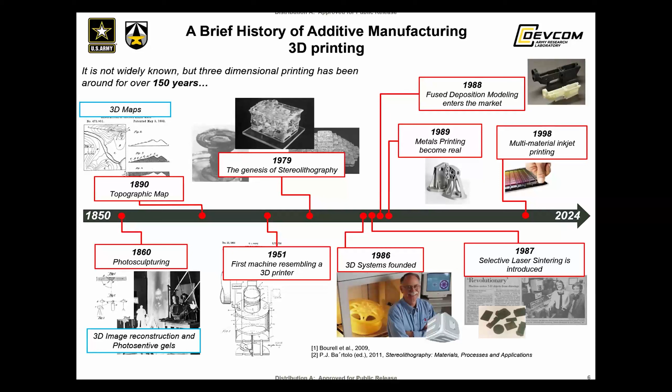So you can see additive manufacturing went through quite a revolution since the 1850s. Here I show you some fun facts about additive manufacturing, why we do it, and I can highlight key phrases or keywords from a patent that was filed in 1864.

You can see that it's the same words that we have been using to justify why we want to do additive manufacturing: greater rapidity, less cost, less time necessary for production. You can scale to a larger or smaller dimension, any proportion desired. All this is the advantage of using additive manufacturing.

So the example I show here is a full body 3D body scanning device. Back in the 1860s it takes a whole building for you to reconstruct a 3D dimensional body. Now we just need a small room to scan the whole body, and then we can actually print the scan as well. So this is an old concept, but now we can do it readily and quickly. So that's a fun fact.

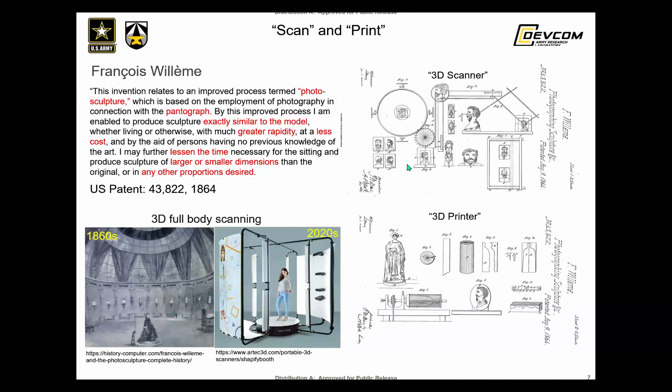Now let's refer back to what they call layer by layer additive manufacturing. In the past, there was a lot of demand for topographical maps for the military. So one way to reconstruct the topographical map is slice by slice reconstruction. This is exactly what they did in the past, and this is a concept for additive manufacturing, layer by layer.

And then recently, of course, we have some machines that are obsolete by now, but were state of the art back in the 80s and 90s.

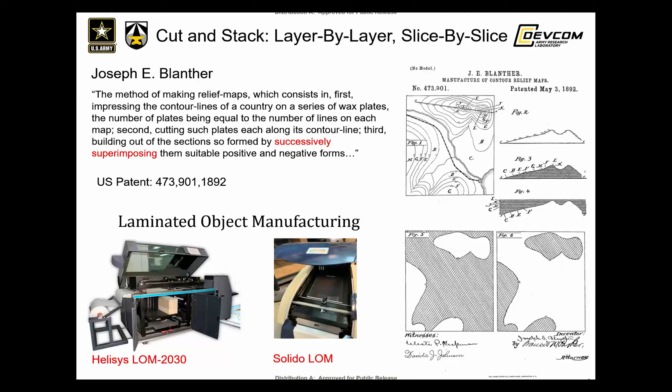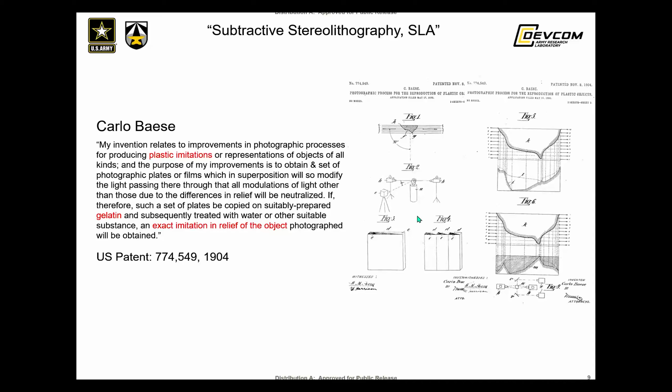One more important patent here is stereolithography. Now everyone knows what the STL file is, that's where it came from. It's the stereolithography technique for building layer by layer using a photosensitive resin. And of course, it's the 3D Systems company that made this technology widely available.

And then, of course, selective sintering, led by a group of inventors at the University of Texas, Austin, in the late 80s. That's what kicked off the renewed interest in 3D printing or additive manufacturing.

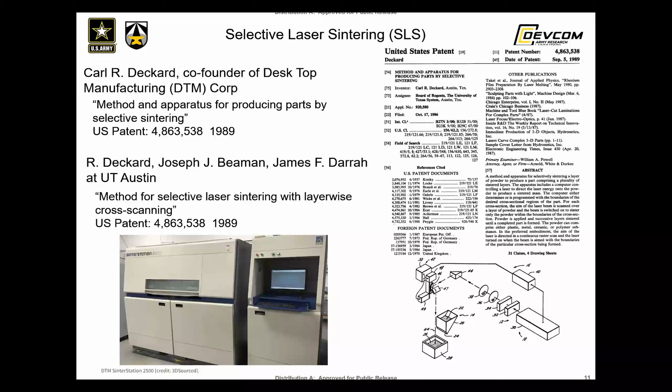And of course, FDM modeling, a 1992 patent, which later became the Stratasys system. This actually popularized 3D printing technologies.

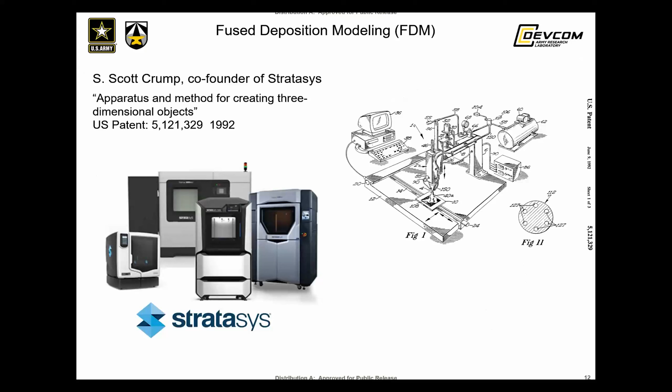All right, now let's switch gears a little bit to share with everyone what the Army Research Laboratory is doing in terms of additive manufacturing research.

So we are an organization that focuses on feedstock development for additive manufacturing, including high strength steel, aluminum, magnesium, and refractory metal. Nick Coogan is going to go over his field of research, which is ceramic additive manufacturing.

But we deal with the same thing: feedstock development, modeling, simulation, and digital tool pathing, as well as in situ monitoring, all feeding into expeditionary manufacturing.

That is to say, we want to manufacture parts in the field at the point of need, so we can repair parts quickly without having to wait for parts to ship overseas, or we can use indigenous material or recycled material to rebuild the part.

So this is kind of a high level concept of what we want to do, or try to collaborate on, or try to advance the art of 3D additive manufacturing.

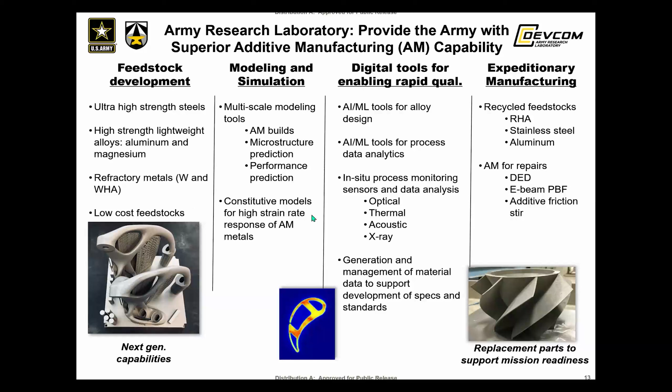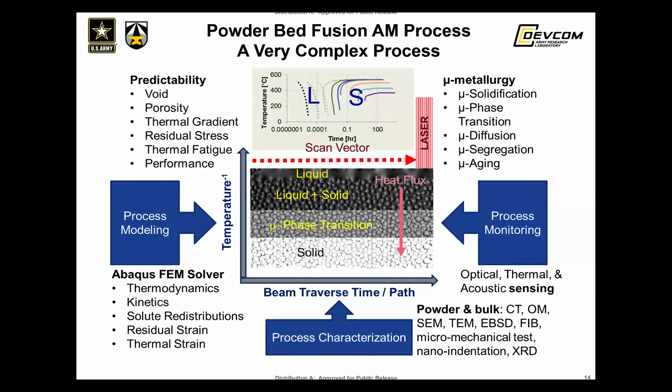So I'll just share an example of what we try to go after, like what kind of experiments we are working on, what kind of in situ monitoring sensors we're working on, and what kind of process aspects we're working on.

One example of point of need manufacturing is that we want to recycle steels, what we call battlefield scrap steel, in the field. We do have a lot of scrap in the field. We want to turn that scrap into a powder and then print a useful part from it. So it's more of a cycle, recycling battlefield scrap into a useful part. That's one main, very focused item right now.

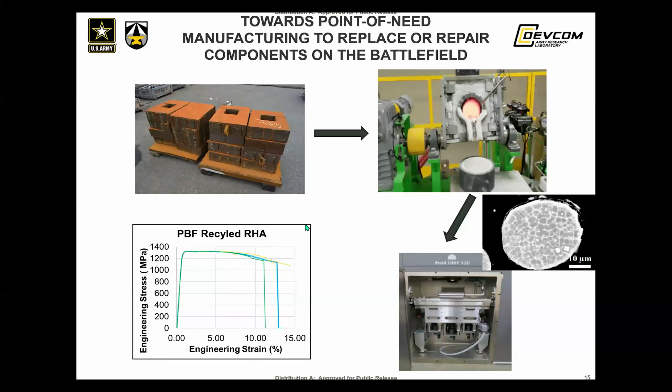Machine learning is the latest addition to our research portfolio, because machine learning algorithms have advanced so much that we have to incorporate this for the analysis of the complexity of the additive manufacturing process. We also want to use machine learning to enable us to qualify additive manufactured parts.

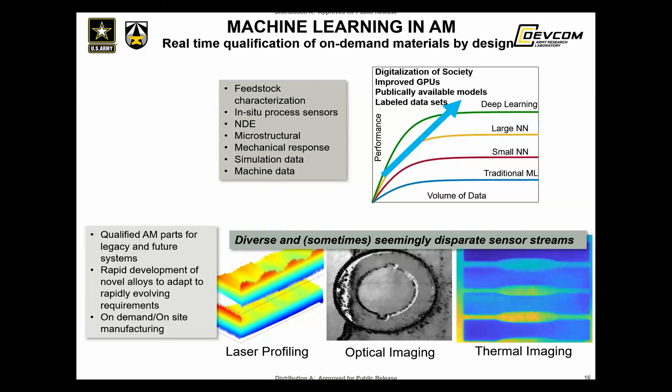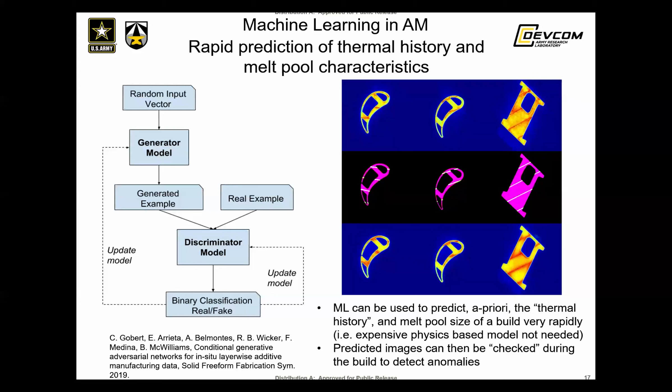So here's an example of using machine learning to predict thermal history layer by layer, and how the microstructure evolves, to detect any kind of anomaly, so that we know whether the part qualifies or disqualifies for usage. That's one example of the application of machine learning with additive manufacturing.

Here's an example of what the Army has fielded in Afghanistan and other parts around the world. We try to demonstrate expeditionary manufacturing, that is to say, we want to manufacture useful parts at the point of need, close to where the soldiers are deployed. So here's some of the examples we've been doing with this Ex Lab.

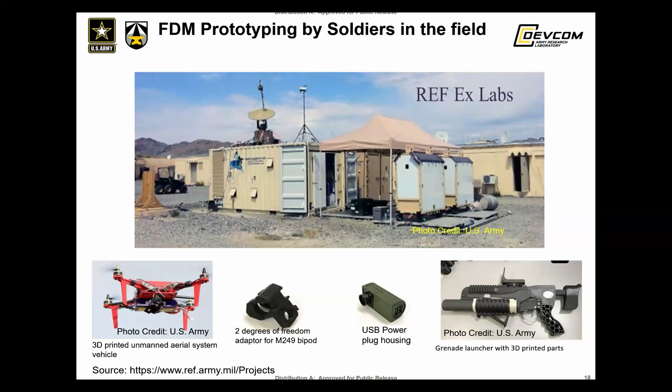Another area we focus on is printed electronics. There's a lot of Army platforms that are what we call legacy systems. The original manufacturer no longer manufactures them, but the Army still needs the system to carry out the mission. So usually we couldn't even find the original drawing or any of the parts. Here we demonstrate we can reverse engineer an electrical part that we can print and populate with functional devices, as a replacement.

So here's one example of a research project we've done. With that, I would let Nick Ku talk more about his ceramic interest. At the end, I will come back and talk about collaborative research and ideas, and how to contact us.

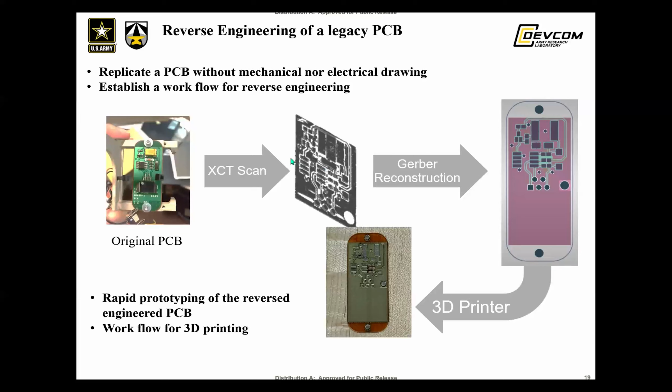Are you guys able to see that okay? Yeah, all right, awesome, yep.

So Jan gave a really good overview on our strategic research objectives towards additive manufacturing. I'm going to get a bit more specific and talk about what we're working on in the area of ceramic materials and additive manufacturing.

As Jan said, I'm Nicholas Ku. I'm a materials engineer here at the Army Research Lab, based in Aberdeen Proving Ground, Maryland. This is our idea on how we're going to look at additive manufacturing for ceramics. It's much more of a materials development research area.

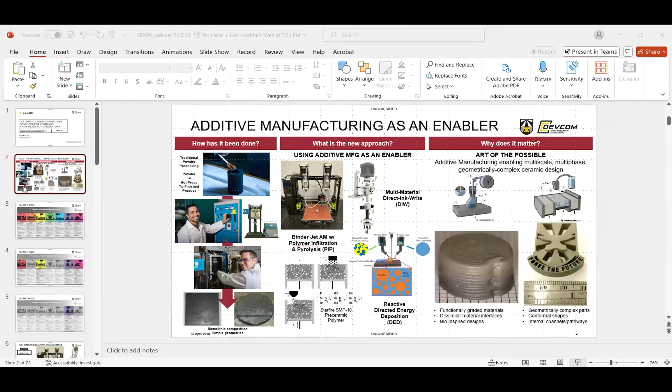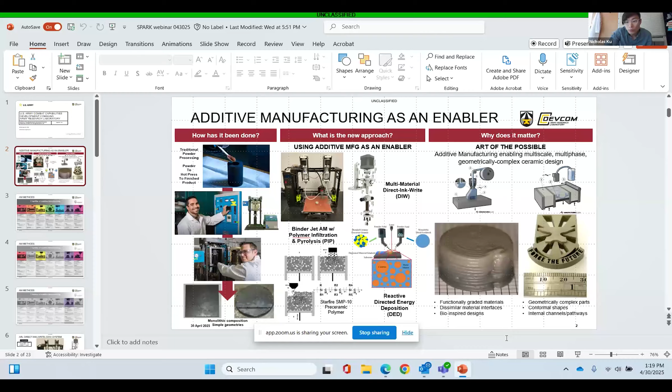We're not really looking at... Hey Nick, I think you have the wrong screen, we only see the preview, not the full. Okay. Is that coming up as full or just preview? Just okay. Let me try this. Yeah, sorry everybody. Is that up? And you're seeing that helps? Yeah, okay awesome, that's good.

Okay, so additive manufacturing as an enabler. In terms of ceramic processing 101, a lot of it is a powder-based solid state sintering process, where you're utilizing extremely high temperature and high pressure in order to form parts. Advanced ceramic materials, and generally you're stuck because you're using uniaxial pressure and things like hot pressing, monolithic compositions, very simple geometries.

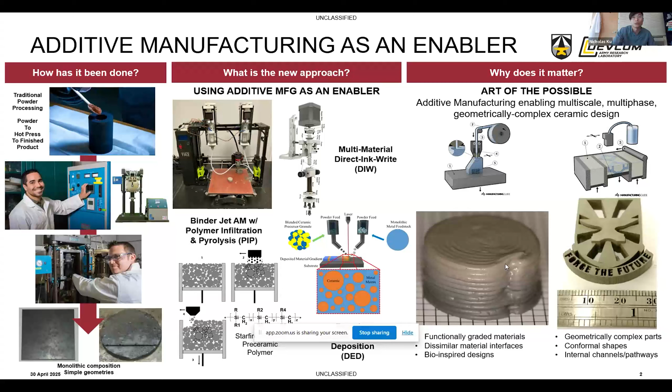So what we want to look at is, can we use additive manufacturing in order to enable complex geometries or complex compositions across our parts. Within our ceramics branch, I sit in a different branch here at ARL than Dr. Yu, but what I would say is, we're not generally mechanical engineers, we're generally materials engineers here. We're not developing new AM technologies, we're not developing new tool paths. We're trying to really use the AM technologies out there, and how we can apply ceramic materials, and what it can do to our ceramic materials processing. Not that we're not interested in that, it's definitely an area of collaboration, but in terms of the expertise we have in-house, this is what we're concentrating on.

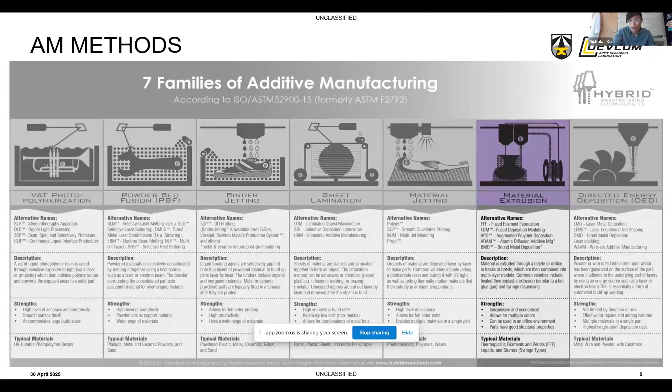So Jan gave a really good overview of the different AM methods and the history of AM, but just to give you an overview, these are from ASTM, the 7 families of additive manufacturing. I'm going to concentrate on 4: vat polymerization, binder jetting, material extrusion, and directed energy deposition. Of course, not in this order, but I'm going to start with material extrusion.

So basically that's on-demand material extrusion, on-demand material deposition. This kind of work started about 5-6 years ago, and we didn't find a multi-material ceramic printer on the market at that time, commercially available off the shelf.

So we actually built our own, where we took a Lulzbot TAZ6, an off-the-shelf FDM printer, cannibalized it to make an XYZ control gantry, and then actually created this feed system where we can load our ceramic slurries or paste, think a clay-like material with the consistency of toothpaste, into those syringes that you can see up on top.

And then those 2 stepper motors above them would actually volumetrically deliver material down through those tubes into that singular print head. You can see that print head exploded on the right-hand side. What happens is you'll have 2 materials entering the same barrel, and we have a 3rd stepper motor spinning an auger that helps provide conveyance, but also inline mixing.

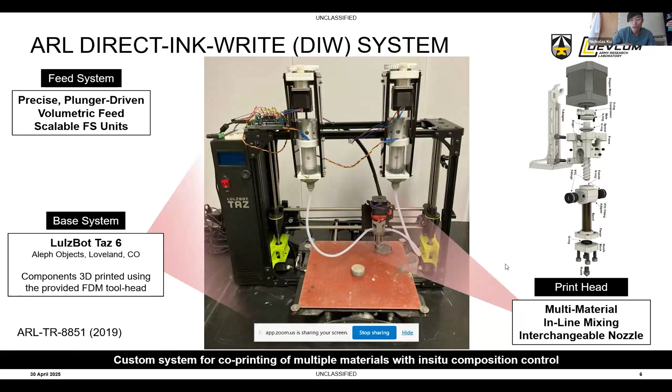So now we have in situ composition control, right? Depending on how we deliver, what ratio we deliver down through the feed system, we could print all material A, all material B, or any combination of the two as we move through the print.

So being a direct ink writer, material extrusion type AM process, we do a lot of feedstock development and understanding the rheological behavior. Definitely a big area of research and collaboration that we can work further on. We're concentrating mainly on particulate suspensions.

So we're taking powder, water, some organic binder, and creating a slurry-based material, generally about 50% solids loading by volume, but understanding the binder, what kind of solvent is being used, or even going to different non-powder-based feedstocks like pre-ceramic polymers are all of interest, but sort of outside of what we're concentrating on in-house here at ARL.

And then really understand the rheological properties of these, right? Because if you have something that's too thick, too viscous, it won't extrude through your nozzle. But also, if you have something that's too fluid, it will flow out, but then it won't retain its shape after you deposit it down on the bed. So understanding that rheological role, or flow role, of your feedstock is extremely important.

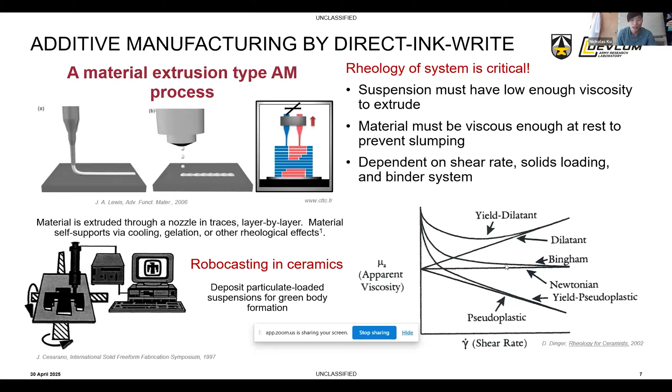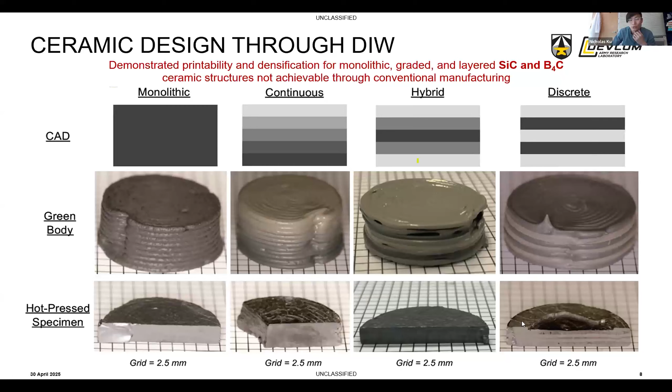The idea behind this was mainly for soldier protection. The idea was, in advanced ceramics, can we influence crack propagation through a material by changing composition?

So this is that same functionally graded part that I showed in that second column in the previous slide. But this is after we sintered it, we sliced it in half, and then you could see that cross section through SEM imaging. The darker material is the boron carbide, the brighter material is the silicon carbide. So you can begin to see how that composition changes.

Our mixing isn't bad, but not great, right? If you remember from the printer, we had a simple auger design, and it's generally about a 2-inch mixing area. That auger is only about 2 inches in length. So I would say there's a lot of work and design that could be done to increase that mixing, whether it's changing the auger design or changing the mixer itself. But we are getting these large clumps of one material in the other, right? That's kind of where we're at right now.

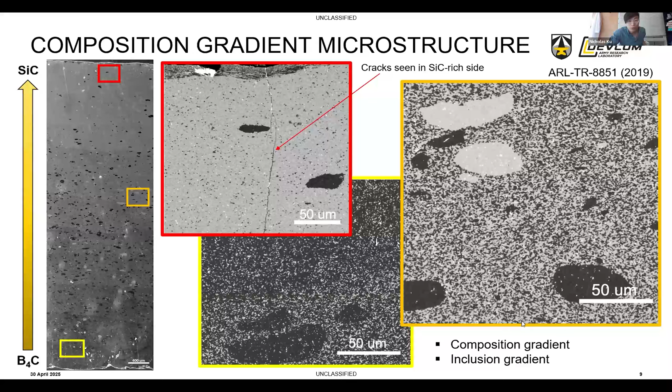And then in terms of the discrete, differently layered materials, residual stress is a big one, right? Whenever you're trying to thermally process two different materials that have different coefficients of thermal expansion, you build up some sort of residual thermal stresses.

So you can see here on the top left, we see a crack emanating through the boron carbide region and then bifurcating and terminating in the silicon carbide region. From the difference in thermal expansion, when you cool these two materials down, the boron carbide would be in tension, which is why you see the crack running through it, and the silicon carbide region would be in compression. So that compressive layer is actually affecting that crack propagation and mitigating it. Maybe that's something we can engineer and use.

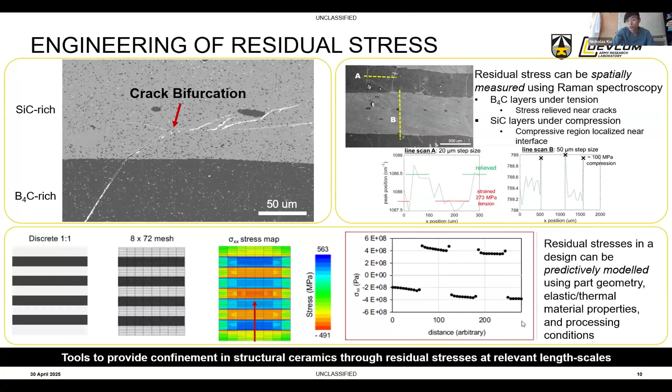But how do we actually characterize that? In the upper right-hand box, you can see how we're using Raman spectroscopy, an IR-based spectroscopy, to measure this residual stress as we scan through our parts. On the bottom, we're doing analytical calculations to calculate what we expect the residual stress to be in these different composition regions given the temperatures we process at.

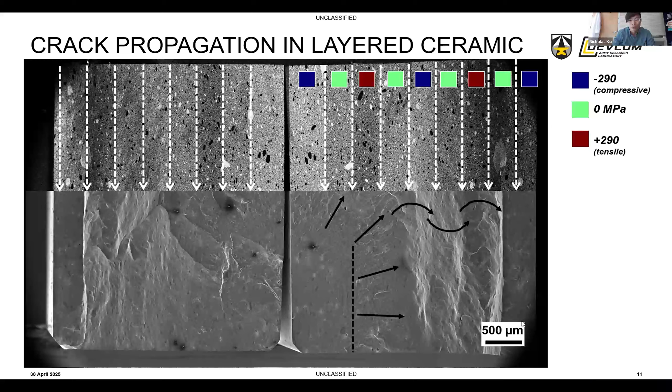Changing topics from material extrusion to binder jetting.

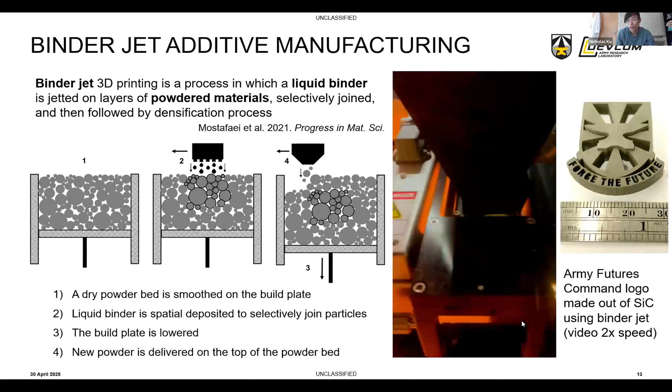Binder jetting is an additive manufacturing technique where you're taking dry powder, basically you have a dry powder bed. You use a print head, not unlike what's in your copy machine, your Xerox machine, that drops liquid droplets of binder to locally glue your powder together, and then another layer of dry powder is placed on top. As any good 3D printing research group, we printed our logo, the AFC logo on the right-hand side, out of silicon carbide.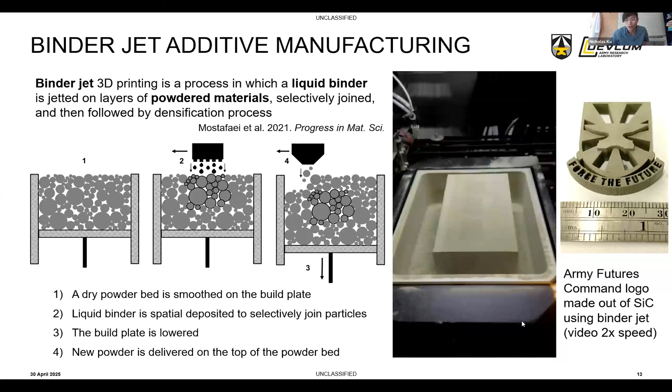The problem is that, because it's a dry powder process, you have two competing mechanisms. You want something that's really flowable, so the material packs well in your powder bed by itself and flows out of the hopper during printing. So you want pretty coarse powder feedstocks for good prints. On the other hand, 90% of the time when we're doing ceramics research, we concentrate on solid state sintering to densify these materials, and that's a surface area driven effect, so we want extremely fine powder feedstocks to allow for solid state sintering.

So generally, well-behaving feedstocks for binder jetting, for actual printing and forming, are very difficult to sinter. That previous part I showed, the silicon carbide AFC logo, we were able to print, but the particle size was so large it would not sinter.

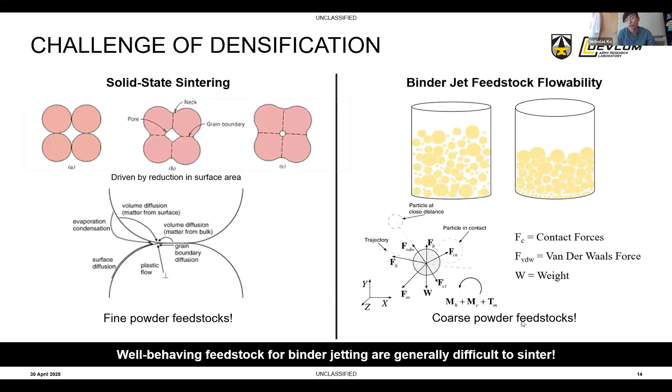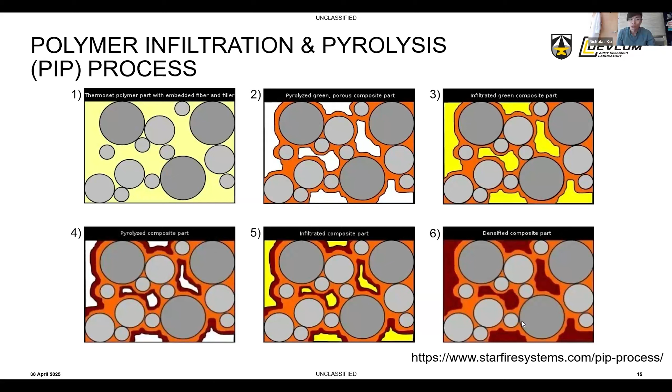So one of the areas of research we're heavily investing in right now in binder jetting is what we call polymer infiltration and pyrolysis, a PIP process. Basically, you create a powder preform through binder jet. We infiltrate this with a pre-ceramic polymer, a silicon-based polymer that when pyrolyzed forms silicon carbide. Through the progression, you infiltrate it with the resin, pyrolyze that, it opens up pores and cracks, then you re-infiltrate all those pores and cracks with more resin, and so on. It's a cyclic process until you fully densify your part.

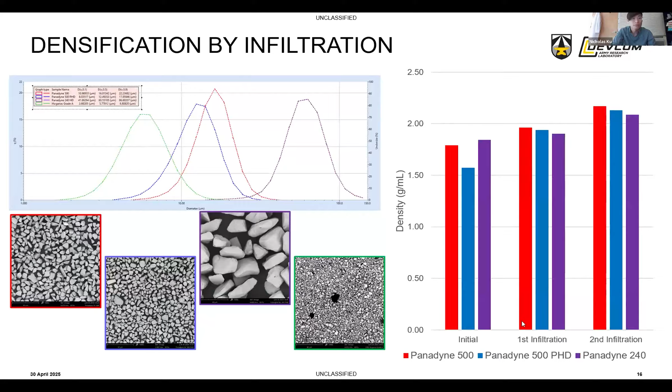Primarily used with metals, and we're trying to enable it with ceramics. Normally ceramics have much higher melting temperature than metals, which makes it very difficult to laser process. So in order to enable any sort of laser-based additive manufacturing for ceramics, the first thing we have to do is understand how ceramics can be processed with lasers.

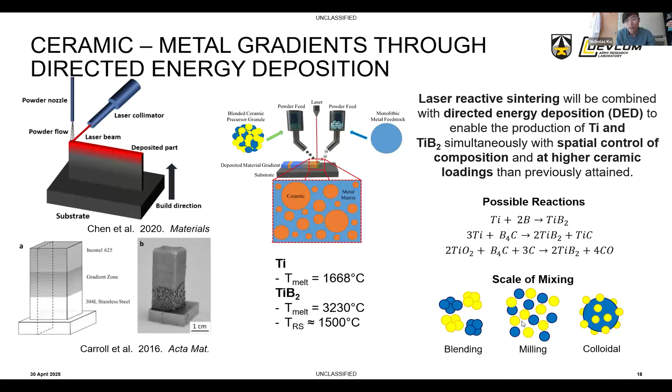That's a really big area of interest that we have right now. One of the things we're trying to figure out is how ceramic materials potentially react under a laser system. In this project, we were actually looking at using precursors in titanium and boron, which under a laser reacted to form titanium diboride, an advanced ceramic we have some interest in.

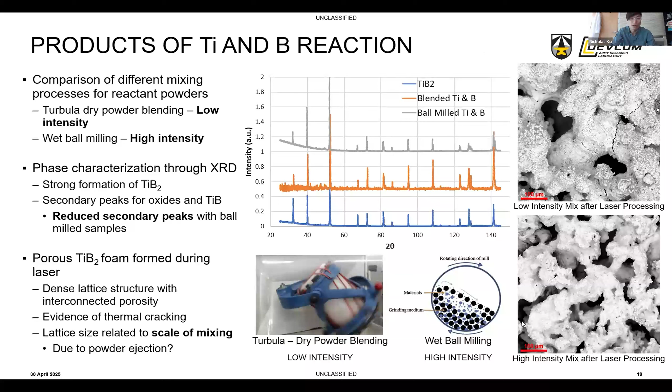We did a lot of work on understanding how well you need to mix the titanium and boron, in micron down to nanoscale different powders, different mixing intensities, and then looked at different laser parameters to see how it affected the density of the part, how the phases formed, the microstructure, and things like that. Laser-based processing is definitely an area of interest, because that would open up many different techniques for laser-based additive manufacturing for ceramics.

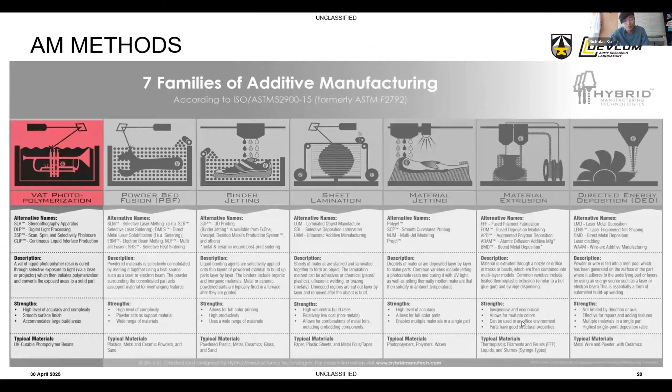Finally, I'm going to talk very quickly about photopolymerization additive manufacturing. In this case, you basically have a UV curable resin that you're suspending your ceramic powder in, and then curing each layer by layer in order to form your part. The advantage is extremely high resolution.

Because you have your light source, you're controlling your geometric complexity.

But really where we're at right now with stereolithography or digital light processing is creating these slurries. We're taking the commercial powders we have interest in and suspending those in different acrylate-based resins and trying to understand how that allows for curing of this material. Currently, what we're doing is we have a tape casting setup in order to create thin layers of this slurry, then using a UV lamp to understand how deep it can cure.

So the more powder you put in, the higher the solids loading, the better it will sinter, but the more it's going to scatter and reduce your depth of cure in your material. So you're playing with that sort of balance. And then also the material itself - in our previous work, we're much more interested in carbides and borides.

These are relatively dark powders with high refractive indexes. We spent a lot of time spinning our wheels trying to figure out if we can get any sort of appreciable depth of cure, but because of how much these scatter and absorb the light source, you can't really do high refractive index materials using this AM process.

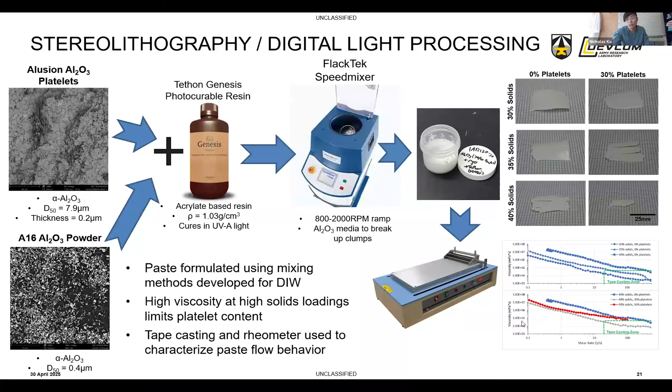So in summary, I moved really quickly, but I wanted to make sure we had time for Q&A afterwards, regarding what we've been doing in terms of ceramic additive manufacturing.

Yeah, so just to end and summarize, in terms of ceramic additive manufacturing research, we're looking at the area of direct ink write, where we have a lot of work on rheological development of the actual feedstocks of the suspensions. We're looking at binder jetting, where we have a lot of interest, primarily in polymer infiltration and pyrolysis - understanding pre-ceramic polymer chemistry and how that can infiltrate and densify, helping us densify these materials.

In terms of directed energy deposition, a lot of it's just how do lasers interact with these ceramic materials. And then finally, in terms of vat polymerization, formulating UV curable suspensions, both on the resin side, but also understanding how the particle size and particle size distribution can affect that.